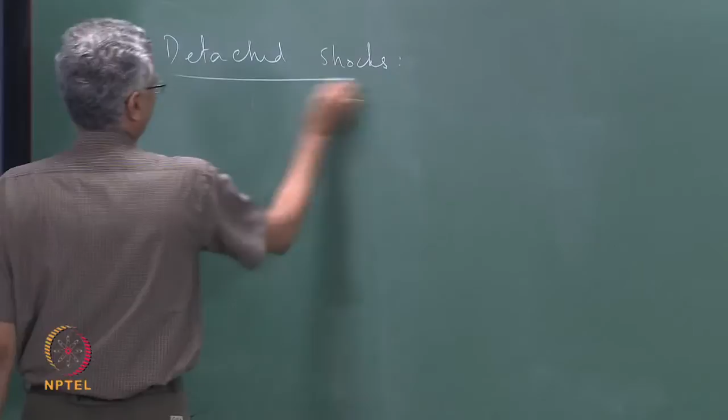In the previous class, we started our discussion of the structure of detached shocks, and we looked at two situations, both involving flow over a wedge.

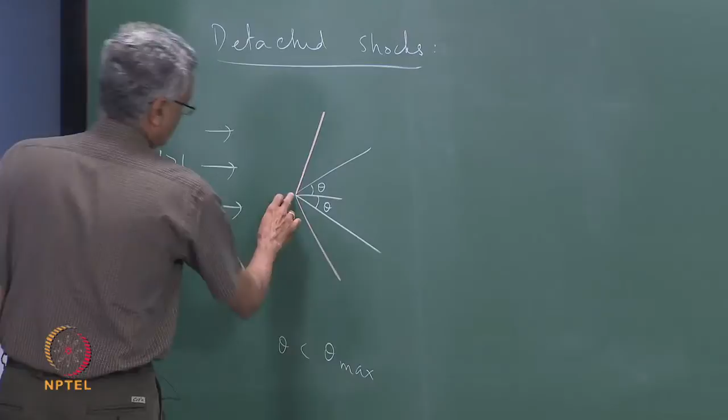In the first case, the semi-vertex angle of the wedge, theta, was less than theta max corresponding to the free stream Mach number, so supersonic flow approaches the wedge. In this case, there is an oblique shock attached to the vertex of the wedge, and the flow is deflected through this shock, then passes through and goes like this.

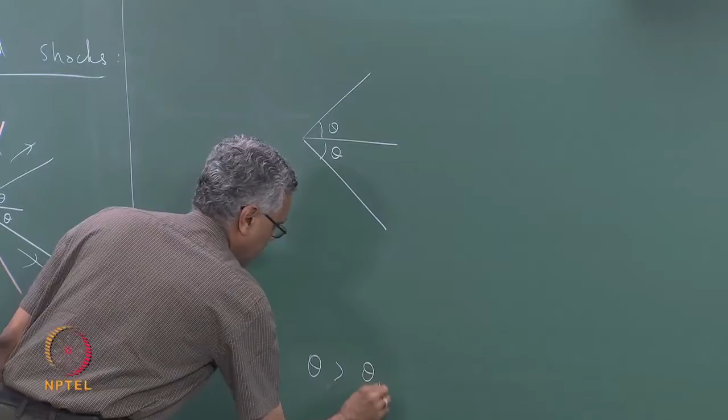In the second case, the semi-vertex angle theta is greater than theta max corresponding to this Mach number. So we had a situation like this, and in this case there is going to be a detached shock like this.

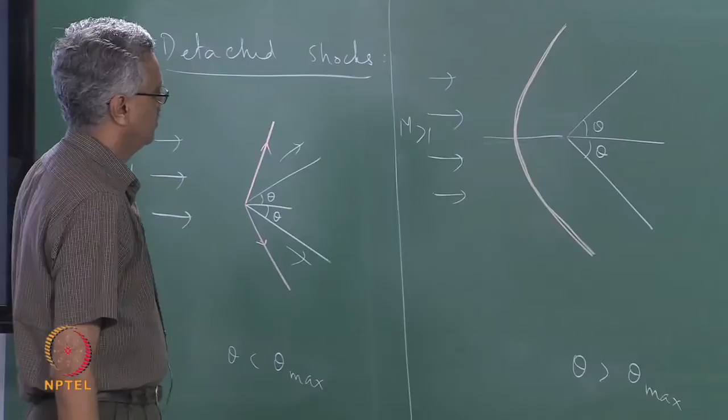We had also qualitatively inferred that the strength of the shock is a maximum here, and becomes weaker because far away the free stream does not even know the presence of the wedge, so it just goes through without any problem. So the shock should be very strong here, and the strength should decrease as we go outwards, eventually becoming vanishingly small, like an acoustic wave. That was one inference we drew.

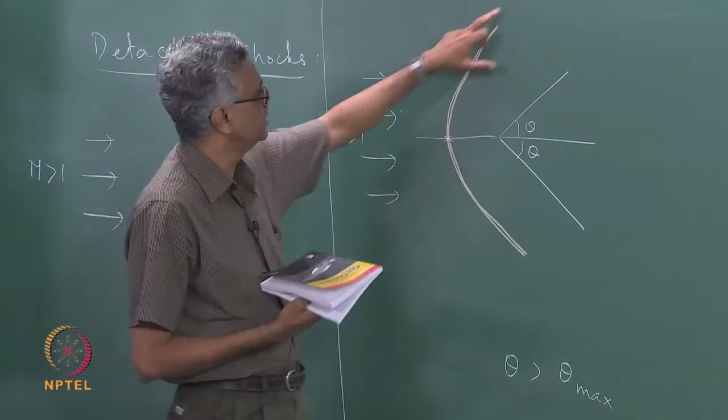The other thing we said was, far away from the wedge the flow deflection angle was 0 -- the flow does not even know the wedge is there -- and at this point too the flow deflection angle is 0, but it is non-zero at this location. So we inferred that the flow deflection angle starts at 0, increases, probably reaches a maximum, and then decreases again to become 0 as we move outwards.

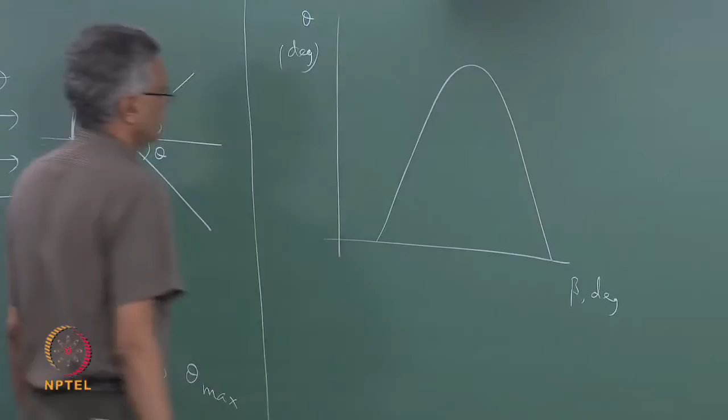Based on this we can correlate this with, for example, the theta-beta-M curve corresponding to this Mach number. Let beta in degrees be on one axis and theta in degrees on the other. If I draw the theta-beta-M curve corresponding to the free stream Mach number, it should look something like this -- this is theta equal to 0, this is beta equal to 0, and this is beta equal to 90. So this is the theta-beta-M curve corresponding to this Mach number.

The important point here is that this theta-beta-M curve corresponds to this Mach number and represents the locus of all possible solutions for an attached shock wave, but here the shock wave is detached. So whatever we say is going to be only qualitative, not quantitative, but by and large these qualitative inferences seem accurate when compared with solutions from a very complex CFD calculation, for example. So the inferences are qualitatively consistent and accurate, which is why we are going through this exercise.

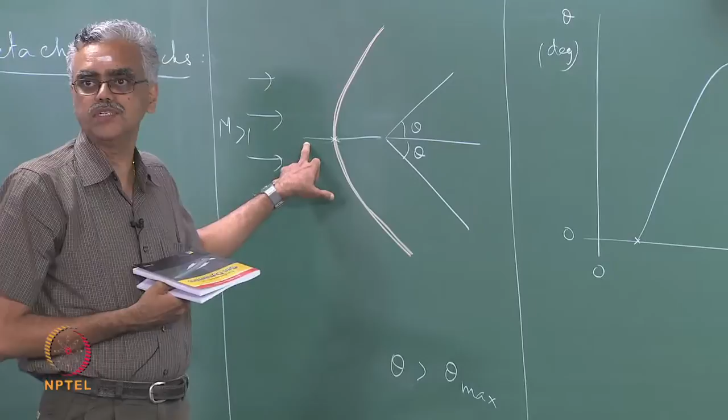Looking at this curve, if I start from here, the flow deflection angle is 0, then as I go along it increases and reaches a maximum. Then as I come down, the flow deflection angle decreases and becomes 0 here -- exactly what we said was happening along this curve, that the flow deflection was 0 here and 0 there, reaching a maximum somewhere in between.

Let us see whether this is consistent with the other inference about the strength of the shock wave, or loss of stagnation pressure. You notice that the loss of stagnation pressure, or the strength, is very high at this point. As I move along the strong shock branch, it becomes weaker, and continues to become weaker once I move into the weak shock solution, becoming weakest -- infinitesimally weak -- when I reach the Mach wave or isentropic wave solution. So this is the strong shock branch, and this is the weak shock branch.

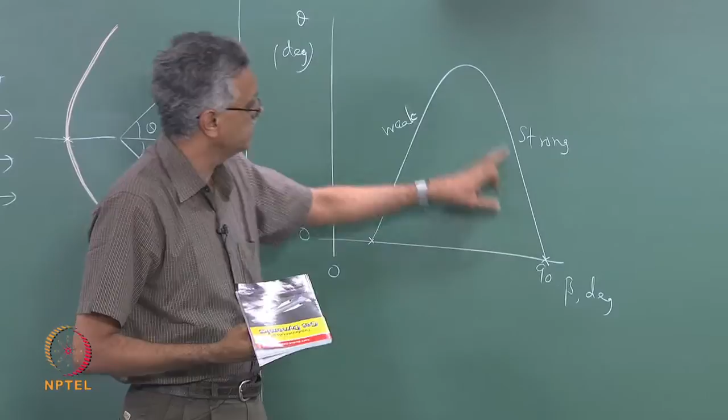With regard to the strength of the shock wave, it decreases continuously from strongest here to weakest here. Flow deflection angle is also consistent with what we had inferred. So we can say that from here, this point of the shock wave represents a normal shock solution, and as I move here, there is going to be some part which is part of the strong shock, and there is going to be some part which is the weak shock solution.

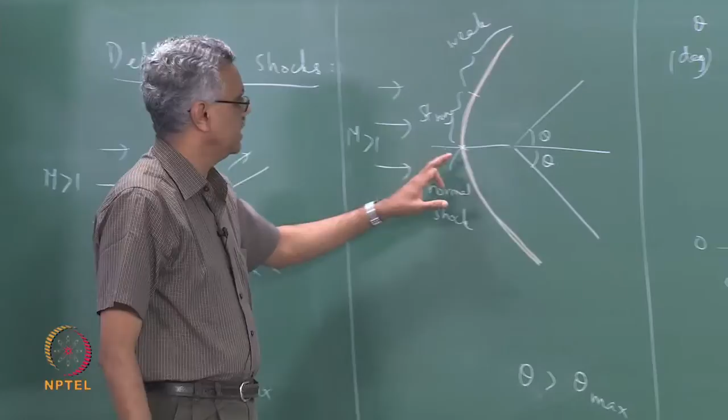This is a qualitative inference. This is how we expect this to be. So you can see that we are actually able to see a strong shock now. Previously we said that attached strong shocks are seldom seen, probably never seen, but detached strong shocks can be seen and are seen in many real life applications.

As I said, when a missile or a space vehicle re-enters the atmosphere, the bow shock ahead of this will have a strong shock portion and a weak shock portion.

But this has other implications. If you remember, we said that for the strong shock solution, M2 is always less than 1, and for the weak shock solution we said that M2 is almost always greater than 1, except for a small portion here.

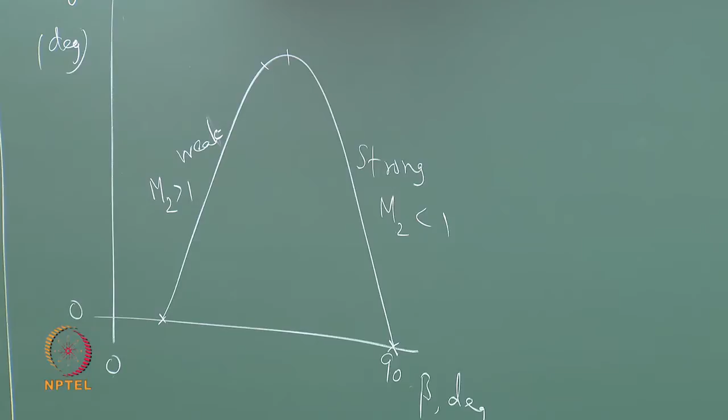So what that means is that the flow, when it comes across this part, the M is going to be less than 1 here, and when it comes across the weak shock portion, the M is greater than 1, which means that there is a sonic line in between these two.

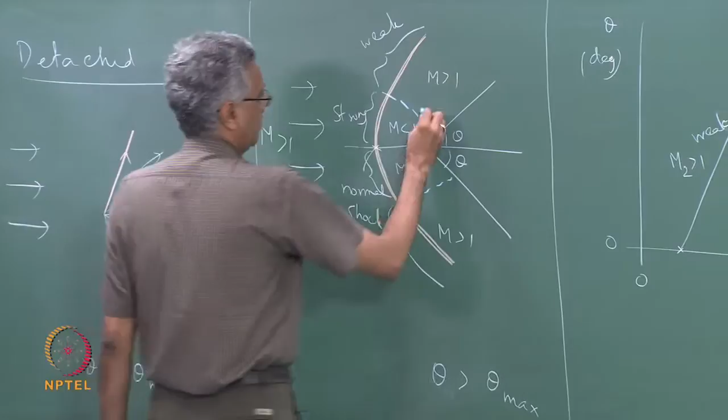So I can draw a similar thing on this side also. We will have a strong shock here and weak shock here. So M is less than 1 here and M is greater than 1 here, which means that we are going to have something like M equal to 1, a sonic line. So this represents M equal to 1.

The pressure increases across this, static pressure always increases, but then the flow is actually accelerating when it goes across the surface of the wedge in this case. So the subsonic flow accelerates and attains the supersonic velocity. Eventually it attains the free stream speed, if you extend this flow, if you terminate this in some fashion.

We really cannot go into that part because we need to know how this is terminated. That is a much more complicated thing, but you can see for now that the flow deflection has to be very large here, and then it gradually eases out and becomes parallel to the surface of the wedge. Same thing here, same thing here.

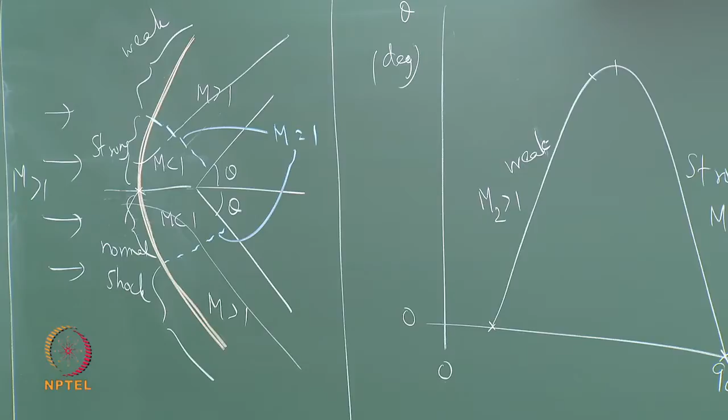But what is interesting is that the flow actually accelerates when it goes across the surface of the wedge. That is something you probably would not have expected to begin with.

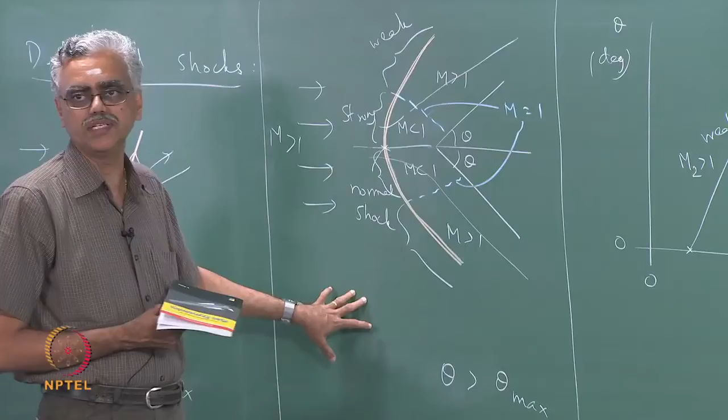But these are only qualitative inferences, and they are actually reasonably accurate when you do a 2D simulation of this particular flow. Because this occurs in many applications, you can get very good ideas about pressure rise across the wave and other flow features just based on this.

The important point is you see this kind of strong shock solution only in these types of situations, not attached strong shock solutions. Any questions?

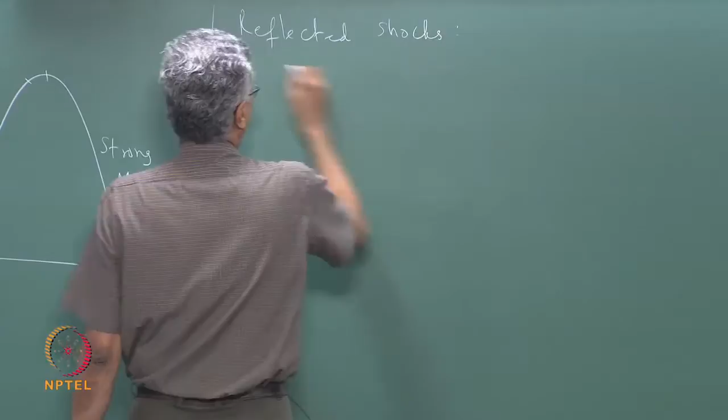So the next topic that we are going to look at is the reflected shocks. What happens when an oblique shock wave impinges upon a surface? So far we were talking about a corner like this at, let's say, at certain angle theta.

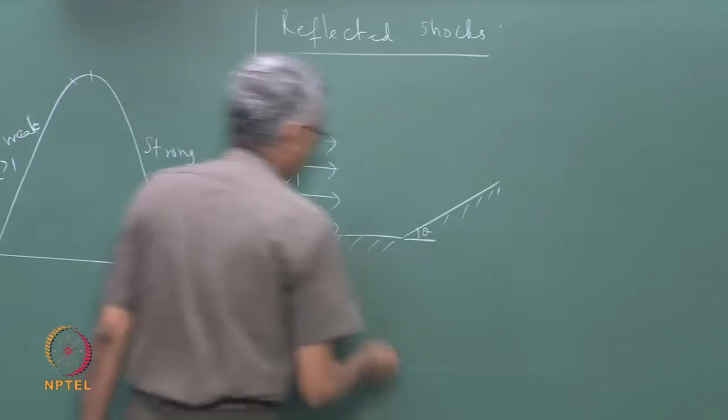So we said supersonic flow, let's say M1 greater than 1, approaches this type of a corner, and we had an oblique shock wave that was generated at the corner, and then the flow went like this. So let us call this 2, and let us call this 1 before this, and we looked at the flow and how the shock wave is deflected and so on, and this angle in our usual notation is denoted as beta 1.

What happens when this kind of oblique shock is triggered inside a duct? In other words, let us say I have a wall like this. So we have a duct in which we have this corner, and what happens when this shock goes all the way?

So remember, there is also a direction to this shock wave, and let us indicate that explicitly. So this is the direction.

Some of the questions are easy to ask, but the answers are not obvious. The question is, how does this shock wave come back? Does it come back? If it comes back, how does it come back? Is it like a reflection from a mirror, where the angle is the same, or not? Those are the things we need to discuss. Let us see what happens.

I do not know how the shock comes back, whether it comes back as a shock or as some other wave. Remember, there are many wave solutions that are possible. Let us say it comes back as something, but I know for sure that the direction is going to be this, on this wave. Let us say this is an unknown wave, but the direction is known, correct?

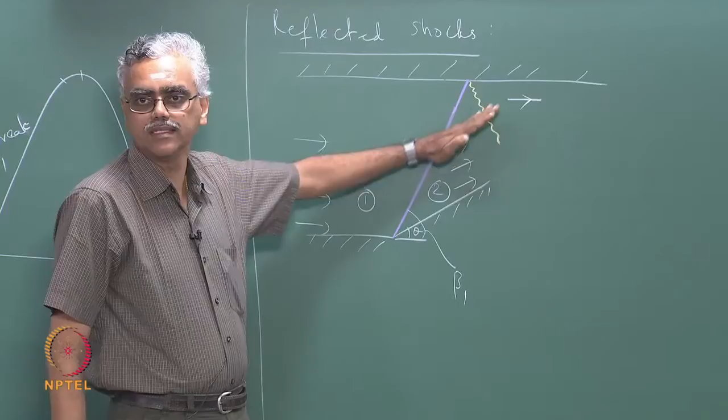And I also know that the flow, after it passes through this, has to be parallel to the top wall, we know that for sure. So the flow direction has to be this. The flow goes into the wave like this and then comes out like this, so that means it is deflected towards the wave. That tells me that this is going to be an oblique shock wave.

So now I can remove this and say that this is going to be reflected as a shock wave. That answers my first question. It is reflected, and it is reflected as a shock wave.

You may wonder why this is so obvious, that it has to come back as a shock wave. In the next chapter, when we look at reflection from a constant pressure boundary, like a jet boundary, you will notice that it does not come back as a shock wave, it comes back as something else. So how it comes back is determined by the fluid dynamics of the problem. In this case, because the flow has to be straightened out parallel to the wall, it has to reflect as a compression wave, because we need to deflect the flow towards the wave.

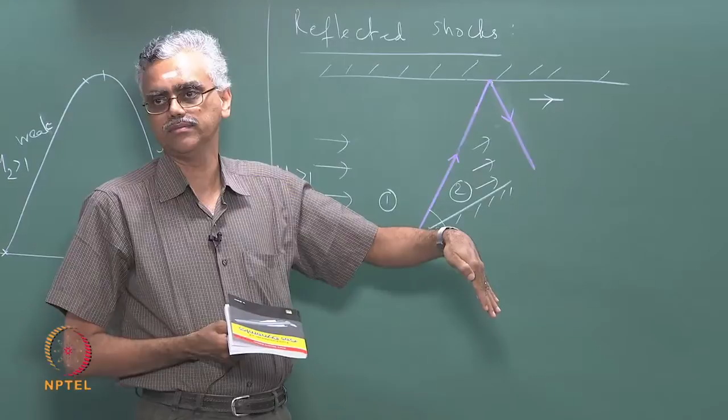So now the question is, what about the angle? We know that this angle is beta 1, correct? What about this angle? What is it equal to? Is it equal to beta 1, or is it something else? That is the next question that we must answer.

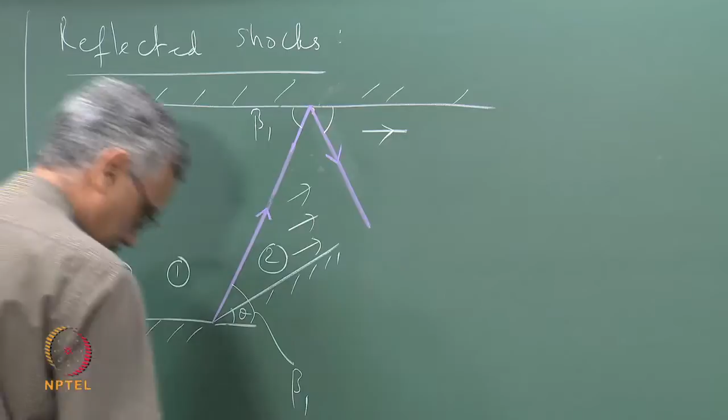Remember, in an oblique shock wave, the angles are always measured with respect to the velocity vector ahead of the shock wave. So if I look at this, this is the velocity vector ahead of this shock wave. That means this angle is theta 1, or this angle is theta. And what is the wave angle now? The wave angle is theta plus this angle. So this is the new wave angle, beta 2.

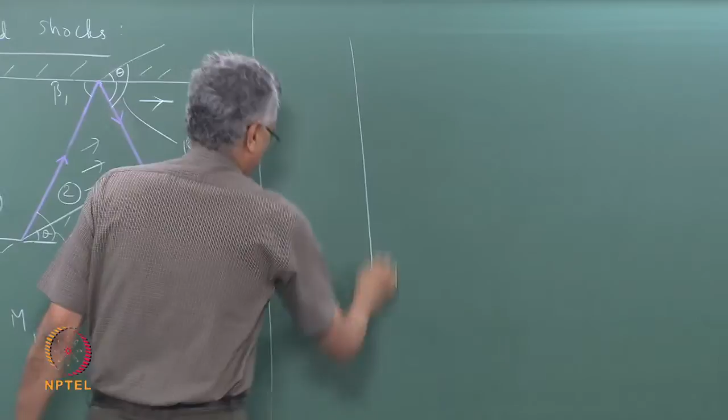And m2 is less than m1. So if I go to my theta-beta-M diagram, let us say this is the curve corresponding to m1. And the curve corresponding to m2, which is less than m1, is going to look like this.

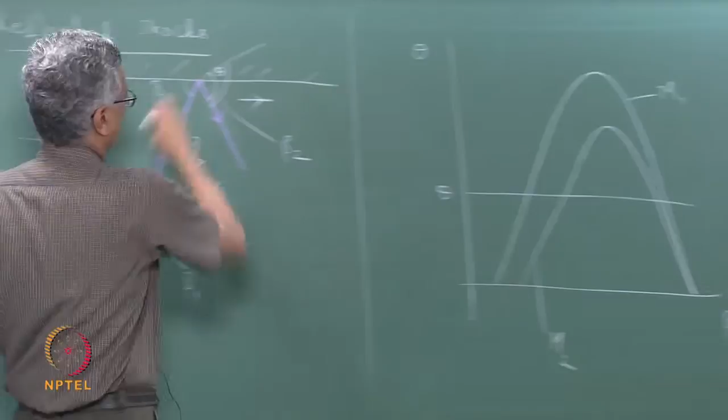What is the flow deflection angle for the second shock wave? Same as the previous one. So if I draw a horizontal line, let us say this is my flow deflection angle theta in this particular problem. The previous situation had this as my beta 1, correct? Actually, this is a little confusing, so let me write it like this. Let me call this beta 1, right?

So I want the same deflection angle, but now the Mach number has reduced, which means my wave angle is now going to be higher. So I am going to pick up this solution for the same angle, this will be my beta 2, which tells me that this reflection is not necessarily going to be at the same angle. That angle is determined by m2 and the fact that theta is a constant.

Okay, so if everything is fine, then the shock is reflected back this way. I can actually calculate beta 2 from my theta-beta-M table, there are no issues. So this is what is called a regular reflection.

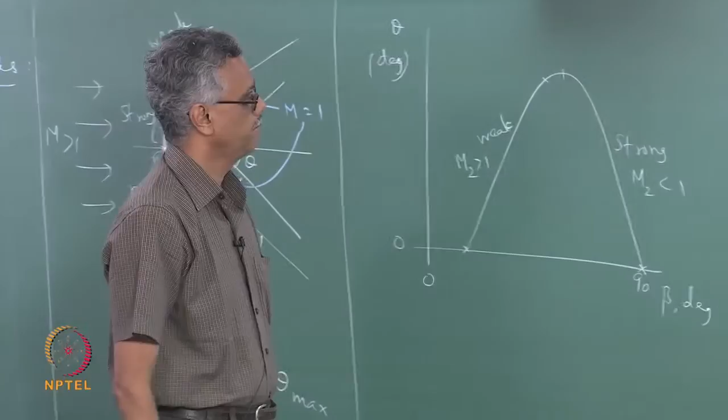So we have an oblique shock, it is reflected back as a regular oblique shock wave with a different wave angle.

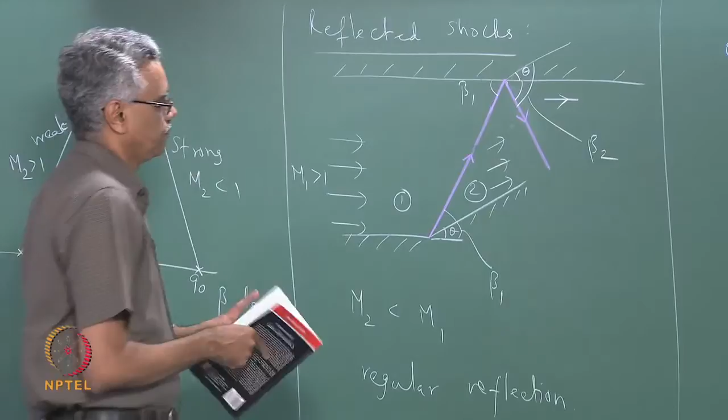But there can also be some difficulties with this reflection. There is also another type of reflection. Notice the way the theta-beta-M curves are, because we are operating at, let's say this is the deflection angle and this was my initial wave angle, now this is my new wave angle, right, M2 decreases.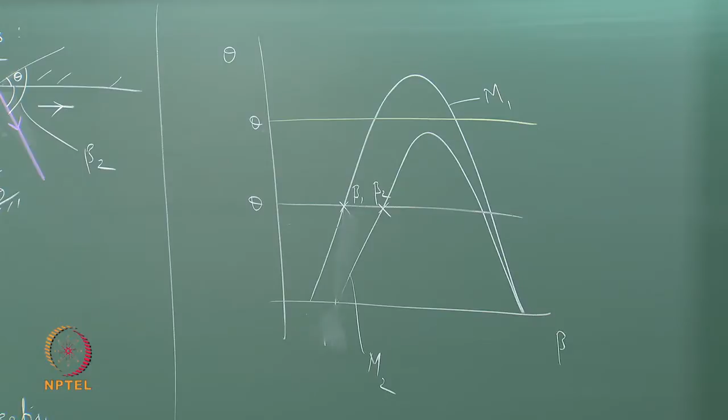Everything was okay. What happens if my initial flow deflection angle is like this? If this is my initial flow deflection angle theta, I increase this angle, it is still less than theta max for this Mach number. So this would be my initial beta 1, but the Mach number decreases, M2 is less than M1.

So you see that a regular reflection is not possible in this case, because there is no solution, we do not get a beta 2. So a regular reflection is not possible in this case. So what happens in this case is that we get a flow which looks like this.

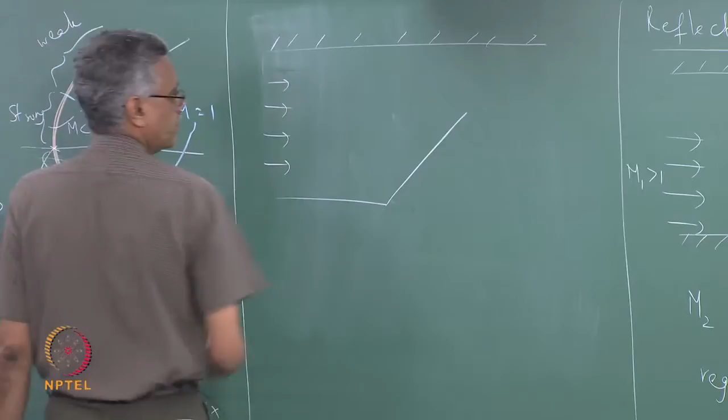So the first oblique shock can be generated without any difficulty. This is theta and this is beta 1. So the first shock wave can be generated without any difficulty, and the arrow on this looks like this and the flow is like this.

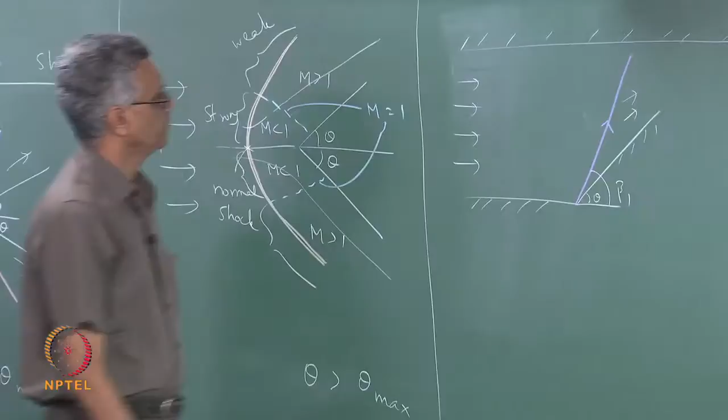But then that curve tells me that a regular reflection is not possible. So what happens in these cases is that you generate a normal shock here close to the wall, and then the oblique shock comes back like this. So this is a normal shock.

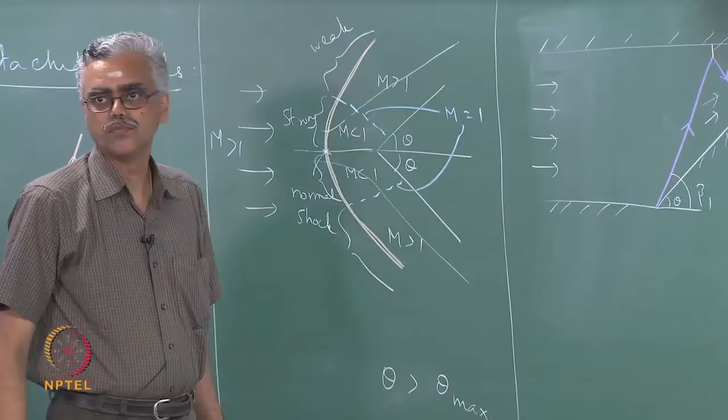This type of reflection is known as a Mach reflection. So an attached oblique shock solution is not possible in these cases. We have a normal shock wave, then the flow comes back like this.

But when you have these types of situations, notice that if you take a streamline which goes through—there is no flow turning here, there is no flow turning across the normal shock wave. So if you look at the flow which goes through like that and another one which goes through like this: this streamline is deflected this way and then deflected back again this way. So this is the other streamline.

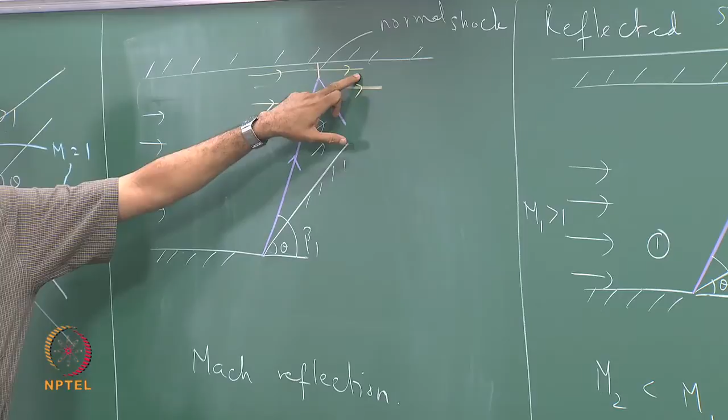If you look at the entropy change across this one, the entropy change is going to be higher because it goes through a normal shock. But if you look at this one, the entropy change is going to be less because it has gone through two oblique shocks, which means that in these types of situations you get a new structure called a slip line.

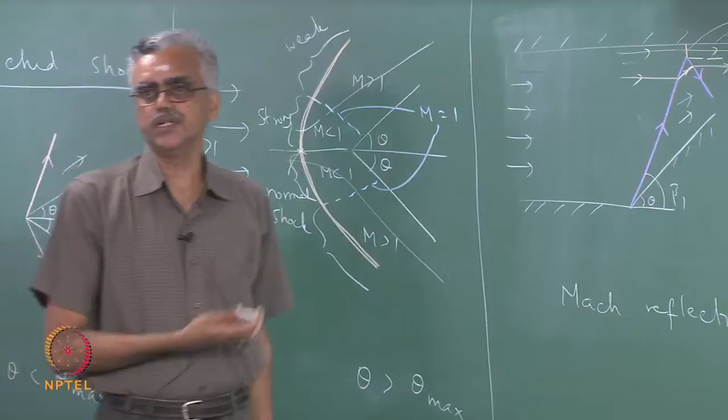A slip line is a discontinuity in the flow field. Normally velocity is discontinuous, entropy is discontinuous, but pressure is continuous across a slip line. So across a slip line...

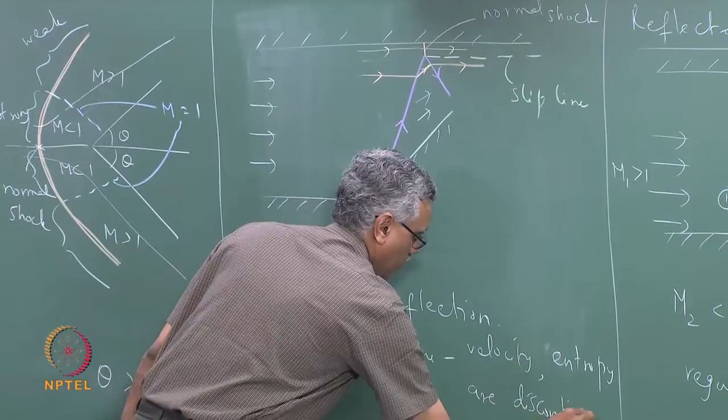Velocity, entropy are discontinuous. Normally pressure, static pressure is continuous, and temperature too.

How come static temperature can be the same? Because normal shock will have higher... no, static temperature normally in real flow you are going to have other mechanisms which will cause the temperature to equilibrate, but from a gas dynamic solution static temperature will also be discontinuous. Yeah, that is correct.

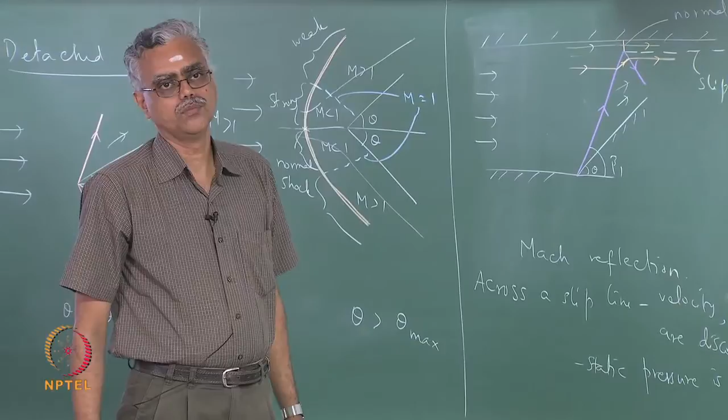What is the extent of the normal shock? Will that be determined by theta max? Yes, that is determined by where you are operating in this curve, by how far away you are from this theta max. The farther away you are, the greater the extent of the normal shock will be.

Because if this theta is such that let's say you are just over here, then still attached shock solutions are possible. Let's say you increase it slightly, just barely, so that means now you are beginning to get the normal shock portion. So the farther away you are from the theta max corresponding to M2, the greater the normal shock portion.

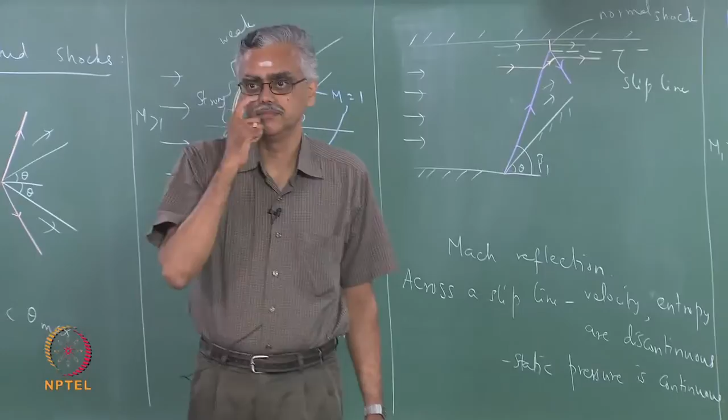How does the reflection depend on the surfaces? So the surface should anyway turn to be horizontal at some point of time, but then there will be discontinuity again.

There will be, yes, that's a good question. Normally what is done is, if you want further reflections, then you do something. If you want to terminate the shock, how do we terminate the shock?

You can terminate the reflections if you don't like them. You adjust this angle in such a way that after this, the flow is completely straightened out and the shock is terminated. It is possible to do that.

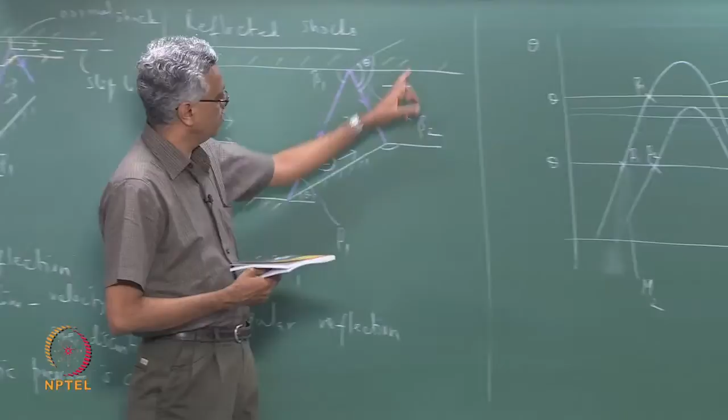In some cases you may want several reflected shocks to achieve further compression before you go to the next component. So depending upon what you want, you can either terminate the oblique shock at some point, or you can have multiple reflections. If you want to terminate, then this theta can have only a certain value, which you can determine from this combination. One of the exercise problems asks you to do that.

So does the reflected shock exactly come at the point where we turn it? Yes, yes. The reflected shock comes and impinges at this corner. Remember, if you look at this corner, we are going to see this in the next chapter. What type of a corner is this?

Generally, if you look at the flow, let me draw this separately so that it is not confusing. We have to look at the corner in isolation. So if you look at this...

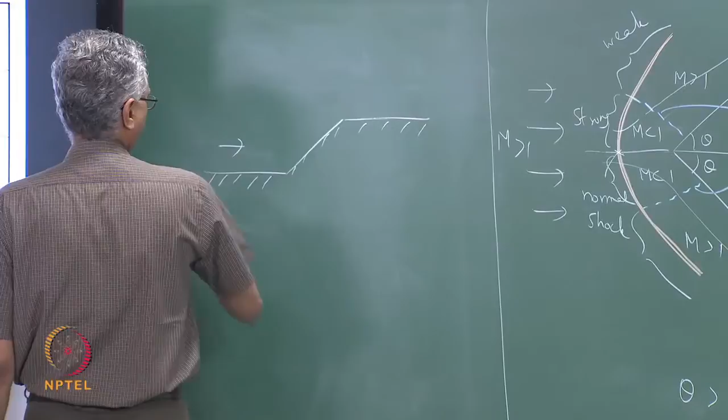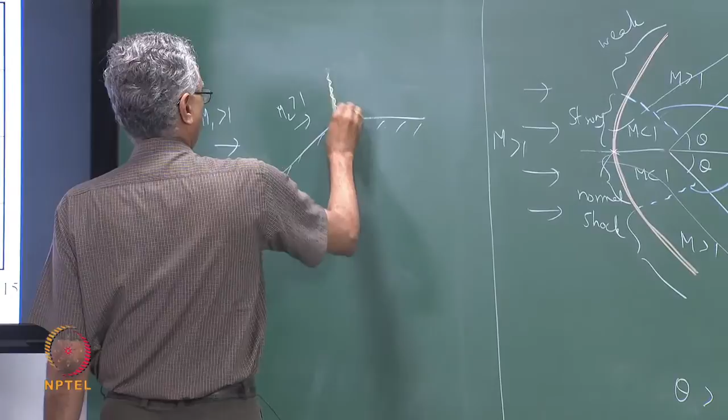I had a flow which comes like this, still supersonic, so M is still greater than 1, M1 is greater than 1. The flow has to go around this corner now, which means I am going to generate some wave. I don't know what that wave is, I need not assume anything about it. I am going to generate some wave from this corner, at some angle, let us say like this. But I know for sure the direction of the wave - let me change the color, let's use yellow. So I am generating some wave here of an unknown type, but with the direction like this.

After passing through the wave, the flow has to be like this. That is our intent - we don't want any reflection and we want it parallel to the surface. So how are we turning the flow in this situation? We are turning the flow away from the wave, so whatever the wave is, it has to be an expansion wave. That is what happens if you look at this corner in isolation.

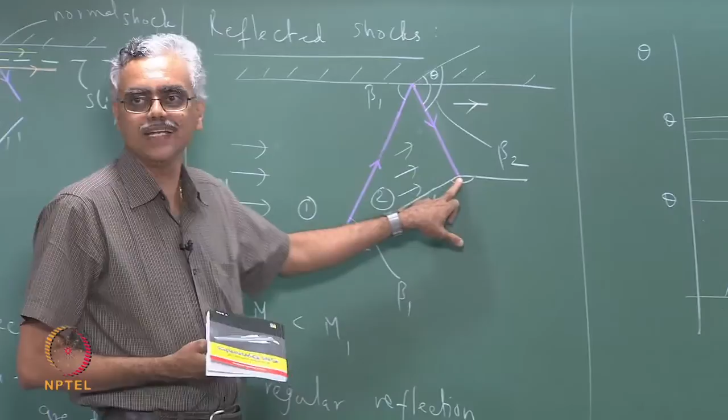Now you look at the corner in combination with this one. You are generating an expansion fan here, and an oblique shock is also incident upon this corner. So the two cancel each other and we get a flow free of reflections.

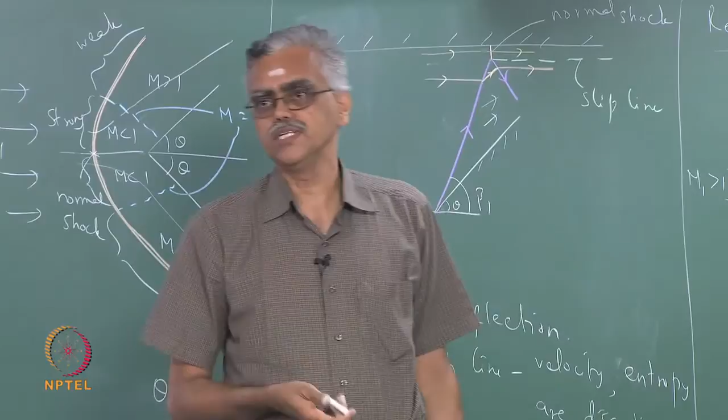That kind of design has to be done very carefully. It is always done in intakes. In fact, we will go back and revisit one of our worked examples - you will see that this definitely happens in practical intakes.

This will have a lot of implications later on, such reflections, when we look at, for example, fan blades. We are going to look at propulsion - that's our objective. When we look at fan blades, you will notice we are operating with a transonic fan blade, which means part of the fan blade has to decelerate and compress a supersonic flow in the blade passage.

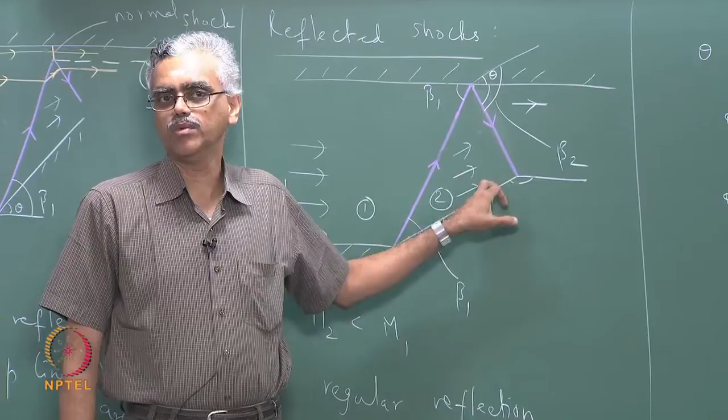So the passage has to be designed properly, and it is very difficult to avoid such expansion corners. The Mach number increases across the expansion corners, which means I have to bring it down again, which means loss of stagnation pressure. So the design is very tricky in these types of situations, but a knowledge of gas dynamics is very, very important.

People have designed very clever blade profiles for fans where you have controlled diffusion so that you avoid these types of problems. Such sections are called controlled diffusion airfoil, CDA, and we will look at that when we talk about fan blades.

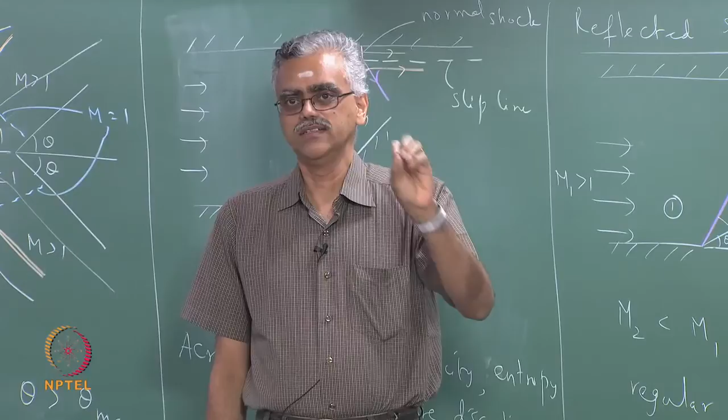Gas dynamics - we started the lecture by saying compressibility effects are significant in inlet, fan, compressor, turbine and nozzle. That is why we are going through this in such detail. Every one of these concepts that you learn here will be very useful later on when we look at propulsion.

Okay, so technically that completes the discussion of this chapter. What I wish to do now is continue the worked example that we looked at in the previous class. I was kind of unhappy with the way we left it, so I am going to revisit this worked example.

We said that normally there will be a terminal normal shock here before we complete this compression process. Let us go ahead and continue the worked example with a normal shock here, and then look at the stagnation pressure recovery in the intake as a result of this. That will just take a few minutes, let us go ahead and do that.

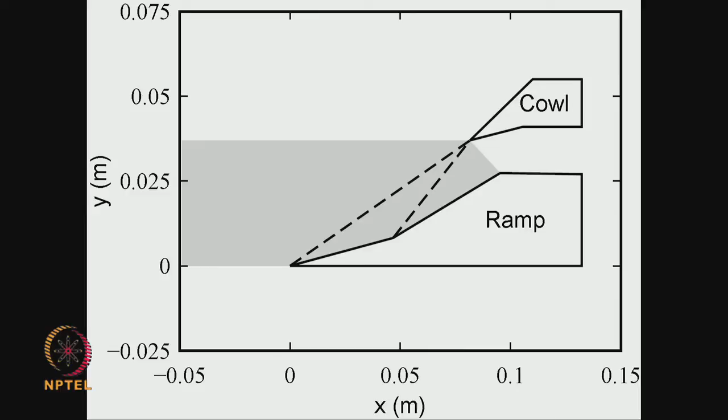One of the most important things you should learn from this chapter is the theta-beta-M curve. You should be able to draw the curve completely and know every aspect of it. That is an extremely important curve in real applications, because the possibility of solutions, detached shocks, attached shocks, strength variation and so on, all of them are tied to that single curve. So you should know the behavior of the curve and be able to reproduce it at any time.

So let us continue our worked example. What we are doing is the following.

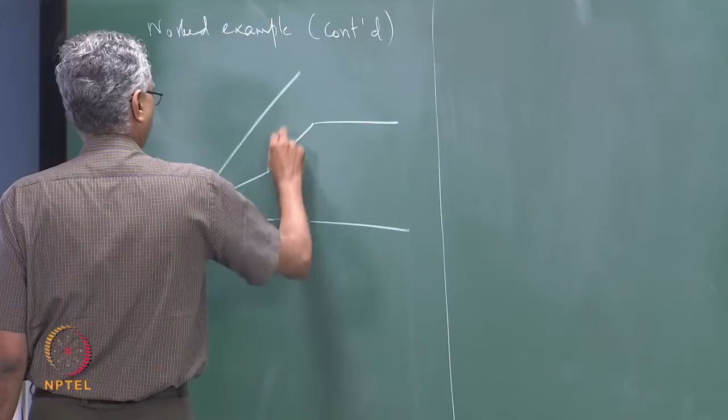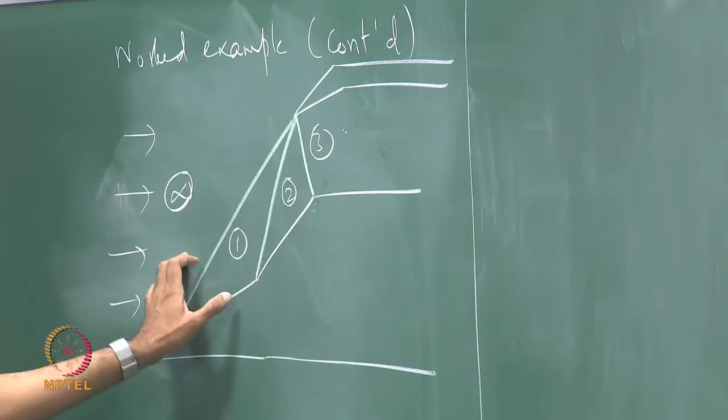This was the intake that we looked at in the previous class. Now I have added a normal shock at the end of the compression process so that the flow becomes subsonic as it goes inside the intake, and we want to look at P03 over P0 infinity to see how effective the shock wave compression process is.

Once again, notice that in this case there is also an expansion corner here. So the flow will actually try to accelerate around this expansion corner, and that is something you have to deal with, because we are trying to decelerate the flow, but there is going to be local acceleration around this. So we try to design things such that this is minimized. We are still operating with the quasi one dimensional, or slightly better, assumption, so this is the best that this theory can provide.

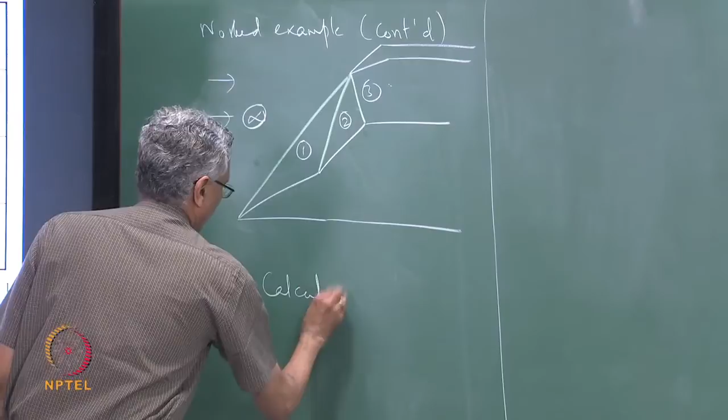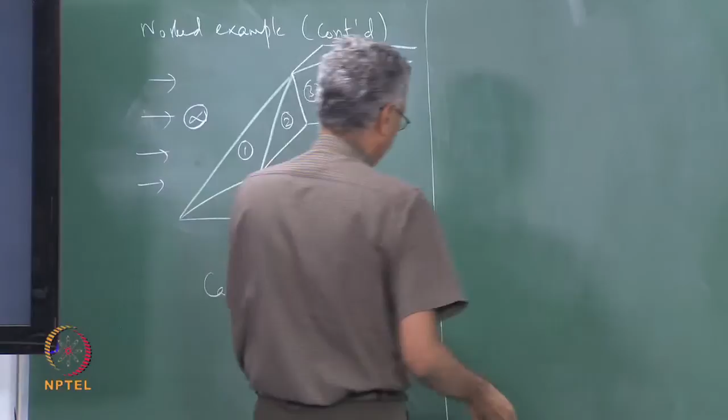So let us go ahead and have a terminal normal shock and calculate P03 over P0 infinity. Let me just quickly recap what we had calculated in our previous class. If you remember, we had calculated M2 as 1.712, P2 was 95.282 kilopascal.

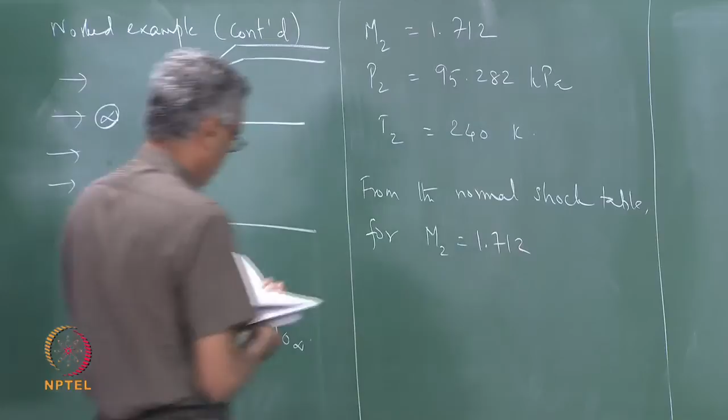T2 was 240 Kelvin, this is static temperature. So now we are going to have a normal shock at 1.712. We go to the normal shock table with M2 equal to 1.712, which goes in as M1. So we retrieve the following quantities from the normal shock table.

We have P3 over P2, the static pressure ratio, equal to 3.2449, T3 over T2 equal to 1.465535, and M3 is equal to 0.638. Because it is a normal shock wave, I can also retrieve P03 over P02 equal to 0.8515385.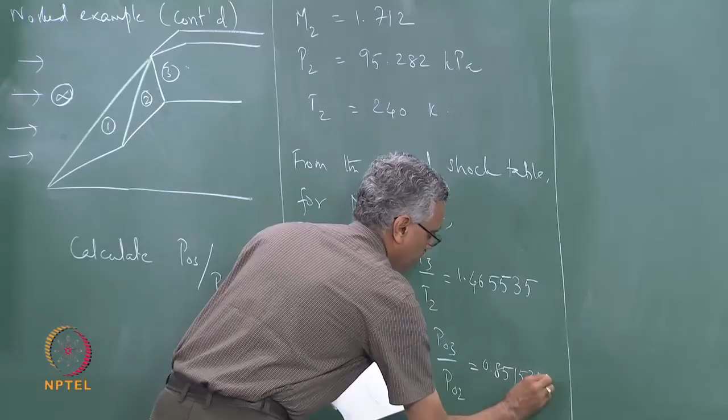So you can see that the Mach number finally becomes subsonic after the normal shock wave. So P03 over P0 infinity can be written as P03 over P02 times P02 over P2 times P2 over P1 times P1 over P infinity times P infinity over P0 infinity. We have calculated all these values during our earlier calculation.

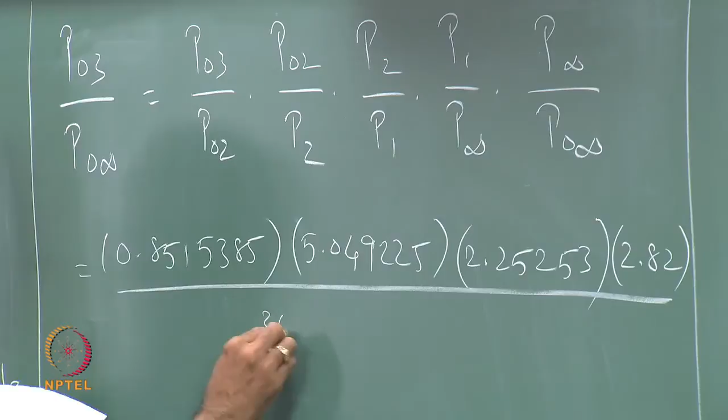So let me just substitute the numbers: 0.8515385 times 5.049225 times 2.25253 times 2.82, divided by P0 infinity over P infinity, which goes into the denominator as 36.7327.

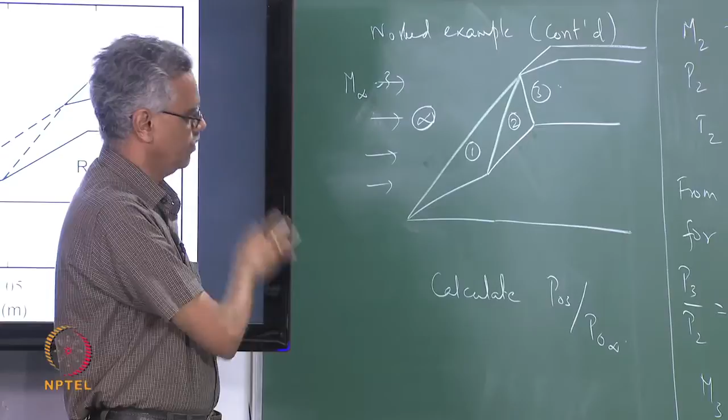If you calculate this, it comes out to be 0.74, or 74%. And remember, M infinity was equal to 3. So from M infinity of 3, we have decelerated the flow to a Mach number of 0.638, and in the process we have lost about 26% of stagnation pressure. This is called the stagnation pressure recovery, 74%, we have lost 26%.

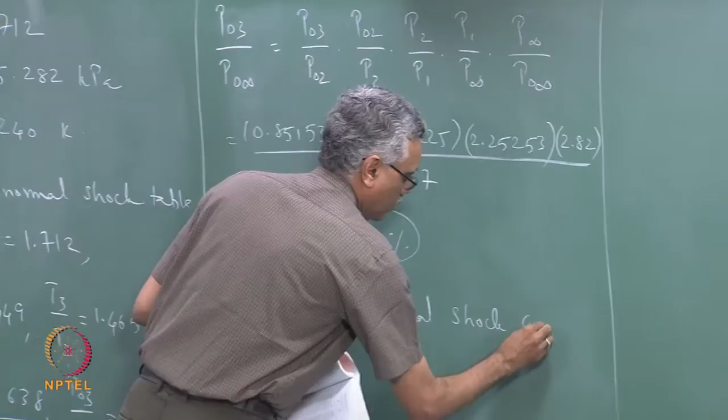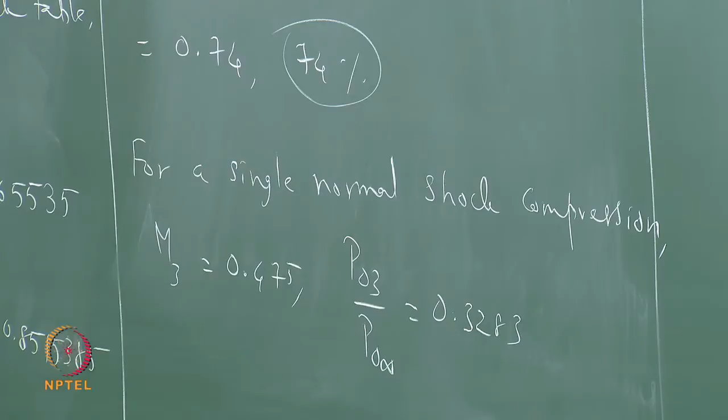The same compression, if done using a single normal shock, we can check that also. For a single normal shock compression at Mach 3, we get the final Mach number M3 to be 0.475, and P03 over P0 infinity comes out to be approximately 0.3283. So you can see the tremendous difference that the oblique shock compression makes.

Here we are losing only 26% of the stagnation pressure, there we are losing nearly 68% of the stagnation pressure. So you can see how much better this is if we can do it in a stable manner. These intakes are not without their problems, and that is something we will discuss later in the course when we talk about supersonic intakes.

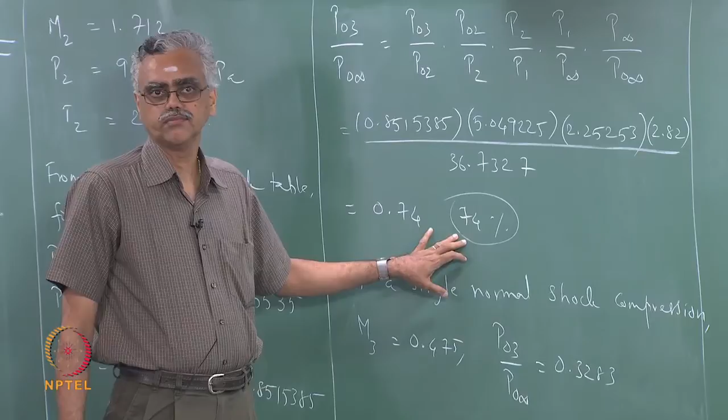This demonstrates very clearly how much better the oblique shock wave compression process is. And for this reason alone, I wanted to continue the example and finish it off today.

So now we go to the next chapter. This is the last chapter that we will discuss in gas dynamics, Prandtl Meyer flow. Here we are going to talk about oblique expansion as well as compression waves, but waves which are isentropic. So we are going to look at isentropic compression and expansion waves.

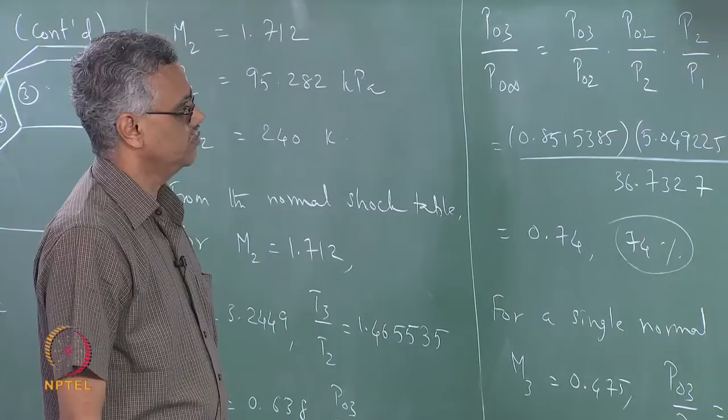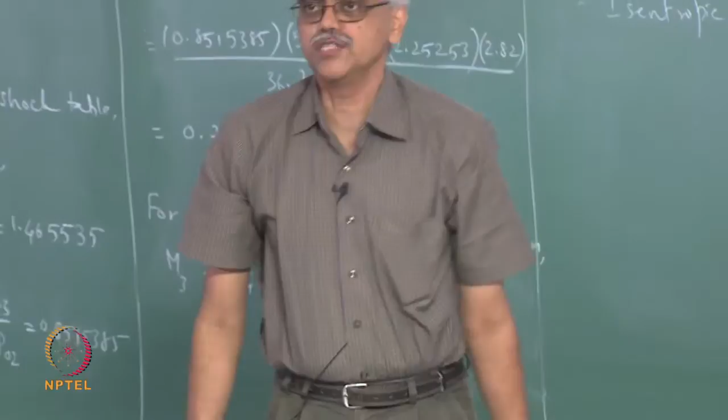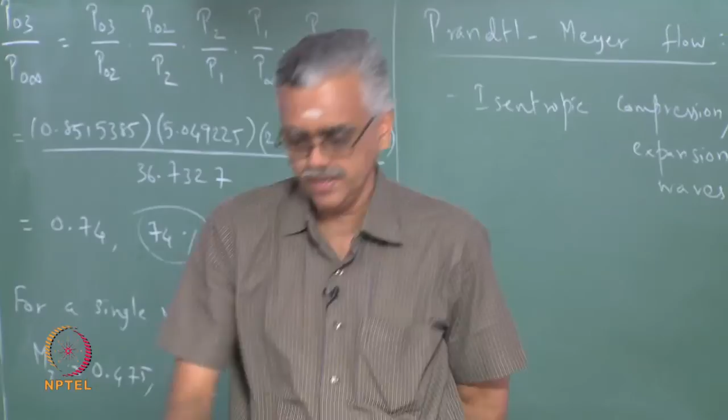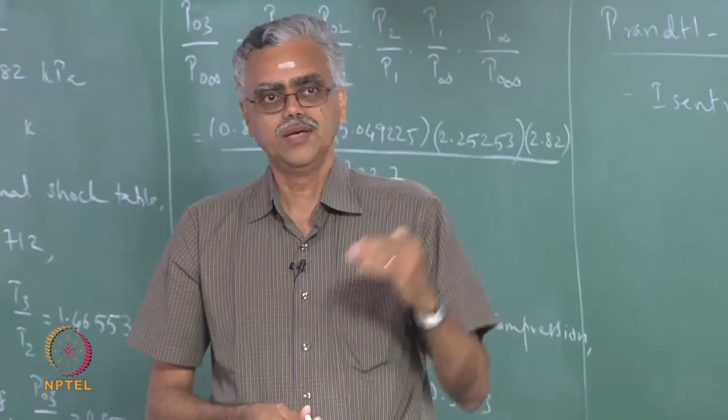But because we are talking about sound waves and acoustic disturbances, the changes across such waves are infinitesimally small and the processes are isentropic, which is why we said that we are going to look at isentropic compression and expansion waves. So, the process across this Mach wave can be a compression or an expansion process.

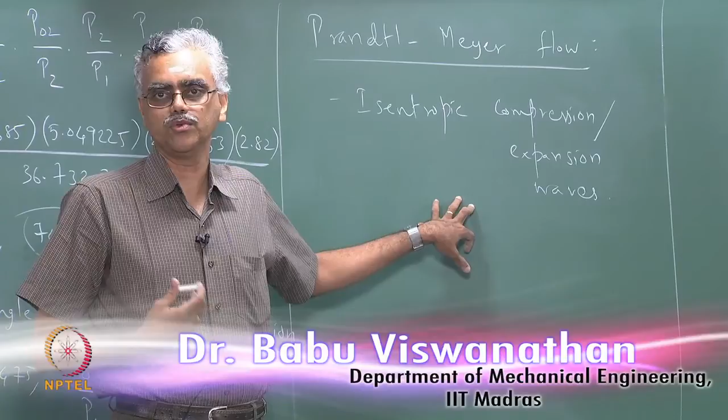In this particular case, we talked about the source starting from subsonic speed and then accelerating to supersonic speeds. What about a source which decelerates from a supersonic speed to subsonic speed? The flow will be exactly the opposite. In one case you get expansion, in another case you get compression, both being isentropic. So, we are going to look at isentropic compression expansion solutions. The solutions are called Prandtl Meyer solutions. The wave itself is called a Mach wave.

We will pick this up in the next class and then discuss this in great detail.